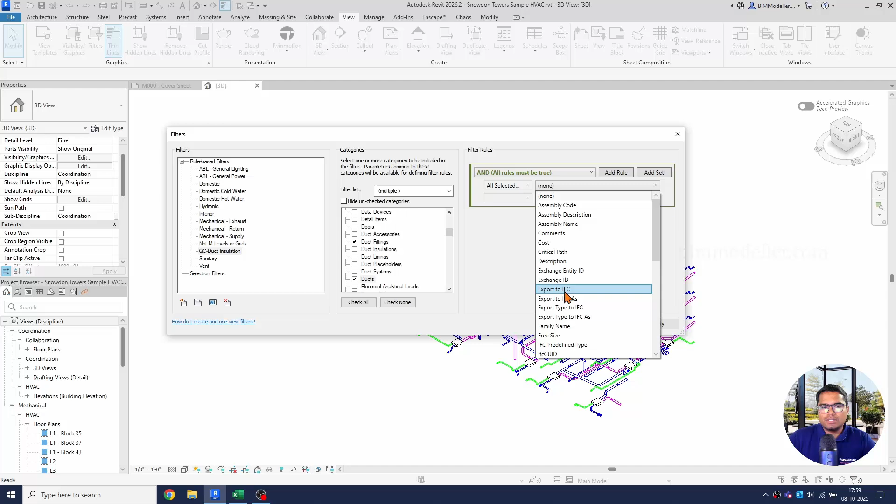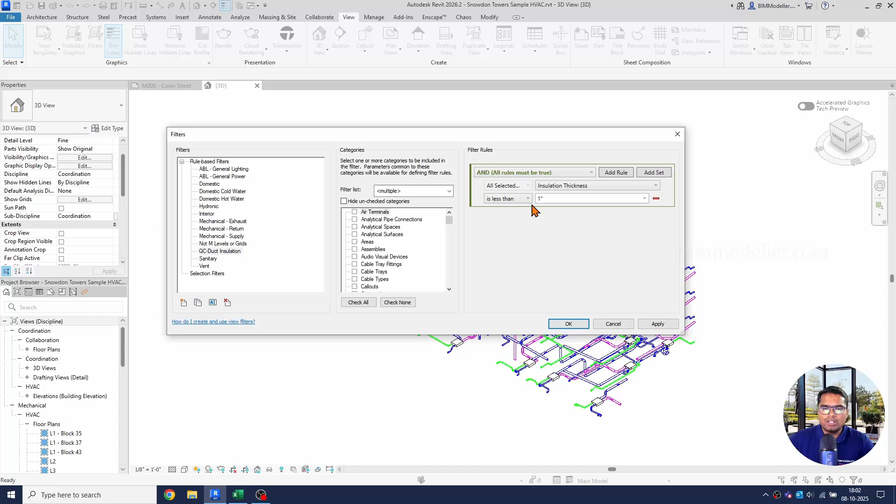Which elements don't have insulation? So I'm going to select the duct properties. These are the common properties between the duct fittings and ducts. And insulation is the thing that we are discussing. So insulation thickness, I'd like to go with the condition: whatever duct insulation is less than one, I'm going to find that. It's not less than or equal, it's less than 1.

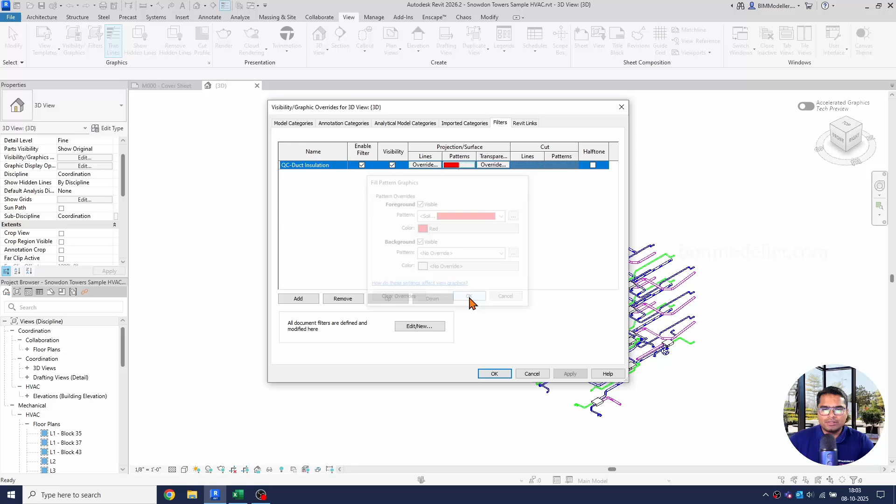Select OK. Now we can go to the visibility settings of the current view, VG as a shortcut. Go to the filter, add. We have QC duct insulation here, add that. This filter is enabled and the visibility of those elements is also enabled, and we can apply the color patterns. In my case, I'm going to apply a solid fill and red color, so we will be able to see it brighter. Select OK and OK.

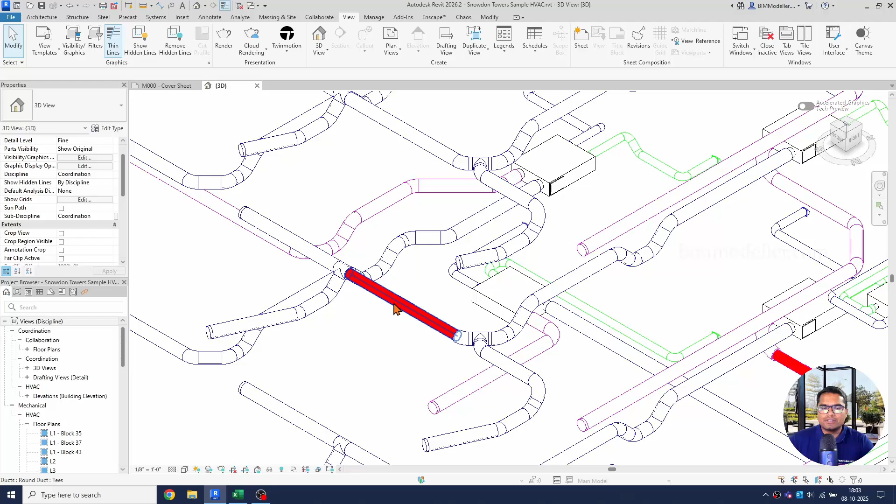Now you can see there are places where red colors appear, and you can zoom in while working. This filter will be active. In some places it shows red instead of blue, and instead of pink it shows red, which means these ductworks don't have insulation. We can identify visually like this. Sometimes it will be very difficult to understand where insulation is missing.

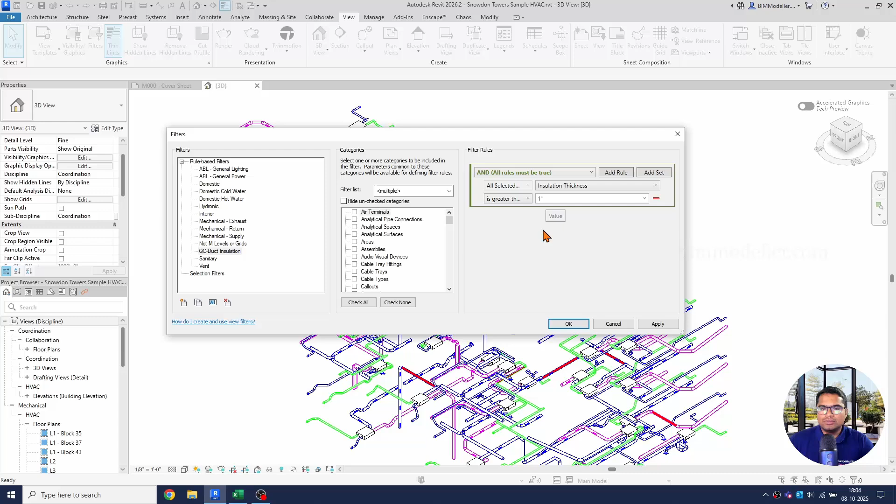In that case, you can do it the other way also. This is the second method: instead of having our QC insulation less than 1, we can make it the opposite way, greater than or equal to 1. Select OK. Now all other elements would be in red, but instead of applying the color, we can turn off the visibility of those elements, so we will have only the remaining elements which don't have insulation.

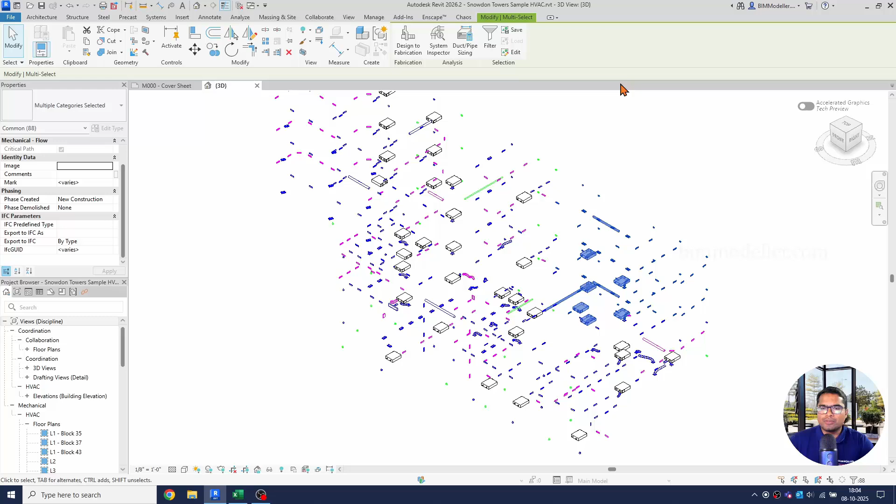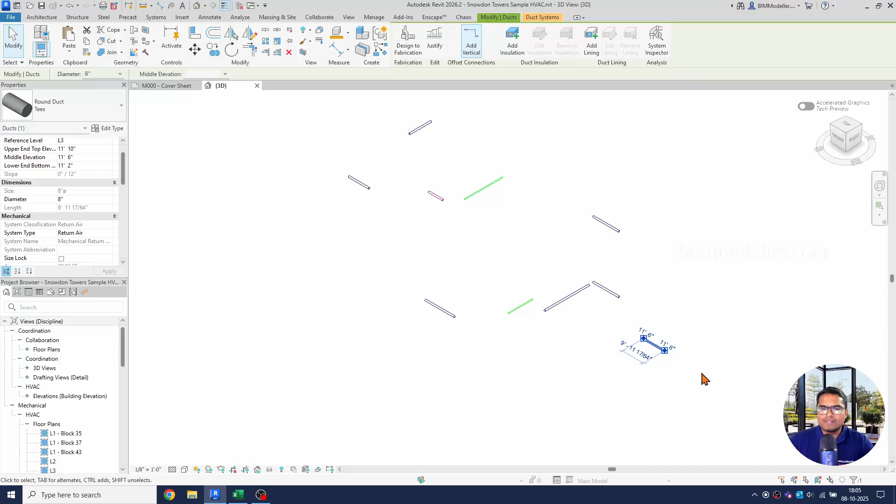So we can turn off the other categories of elements, like air terminals and mechanical equipment, and untick the ducts and duct fittings in the filter. We can turn off category visibility in graphics also, or do it this way. Now these are the elements that don't have insulation. We can select them like this and add insulation. Once the insulation is added, it will pass the condition and automatically be hidden from the view.

We can save this view as a QC view for insulation and have it in the template. That's the advantage. Whenever you start a new project and come to this view, you will understand which elements don't have the property. This doesn't apply only to ducts. You can think of unlimited possibilities. You can create your own views or filters for QC purposes, which can be validated later.